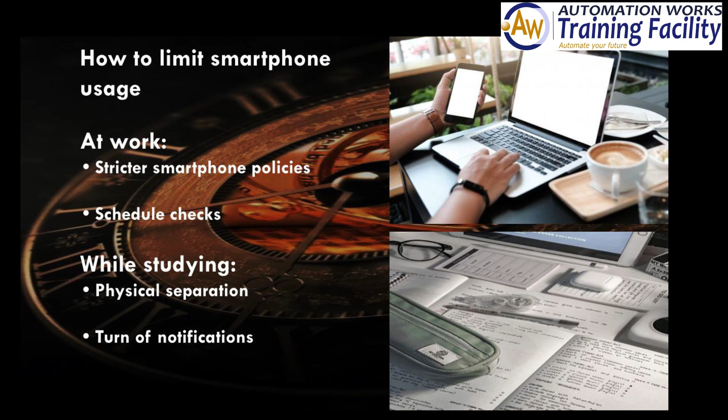Experts recommend that to limit this overusage at work, management can implement stricter policies on cell phone use. People can also, if they know they overuse their cell phone, make a schedule to show themselves when they can allow themselves to check their phone for notifications.

While studying, physical separation from your phone is recommended for students, like putting your phone in another room or turning off your notifications completely.

But although these recommendations exist, research still shows that on average about 1 hour of work time is wasted by workers, and students double that at about 2 hours of time wasted doing unessential activities on their smartphones, which gave me an extra boost to continue with my project to solve this problem.

And this is my final design. Now I will first demonstrate how it works, and then I will show you how we came from nothing to this.

So I call my device the timekeeper, and this is what it looks like. In front here we have touch buttons, which you use to set the time. These are intervals of 1 minute, 5 minutes, 10 minutes, 30 minutes, and 60 minutes.

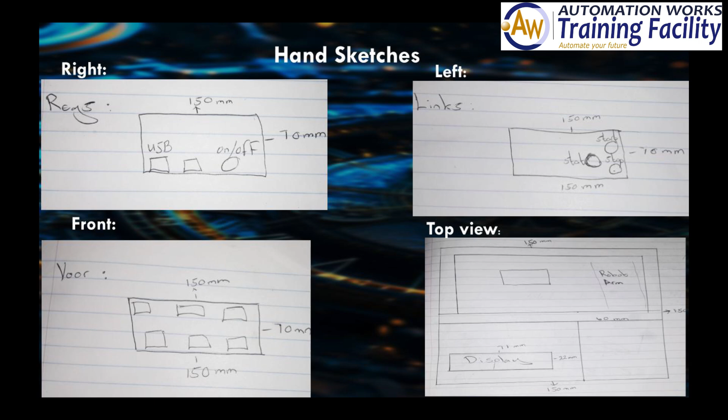And then I sketched the container box in Fusion 360, which is the software platform where we sketch 3D models. My measurements stayed the same as with my hand sketches.

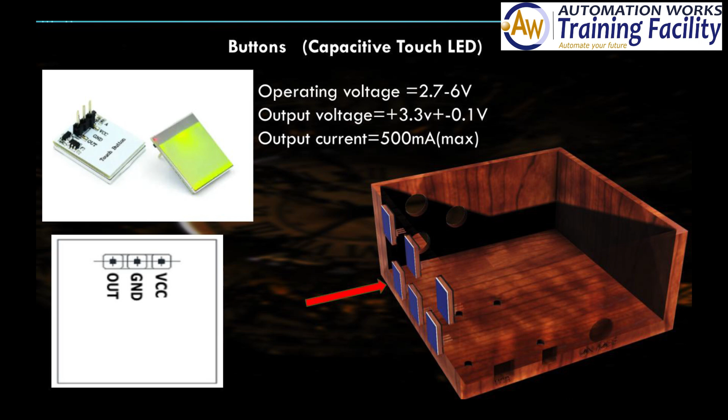And then I started fitting in the touch buttons to see how they will align. The touch buttons operate at a voltage of between 2.7 and 6 volts, and they get 5 volts from the Arduino inside.

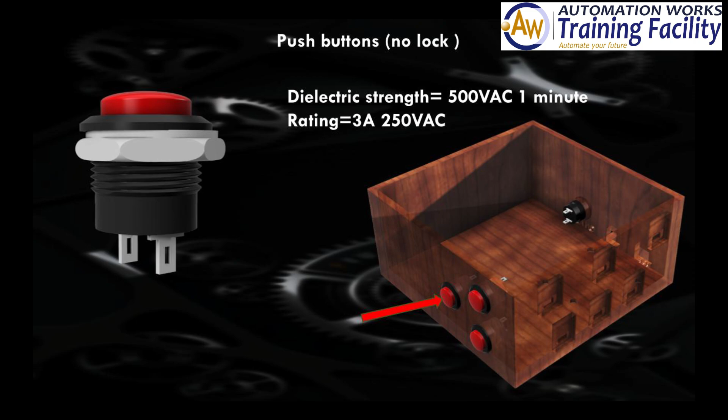And then I started fitting in the push buttons. These are no-lock push buttons, which means if you press them, they don't stay locked inside.

No, I forgot to switch it off. Okay. Yeah.

So these buttons act as a signal instead of an on and off switch. So I can even program the code to count how many times the button has been pressed.

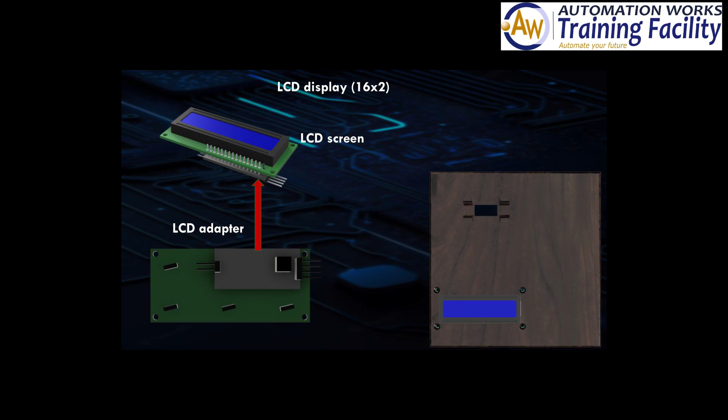And next up, I started fitting in where my LCD screen is going to be placed. As you can see, this is how I determined where it's going to be in the screw holes.

And with the LCD screen came the adapter. The adapter allowed me to, instead of using all those 16 pins and wiring all of them on the LCD, just use the adapter to make a 4-pin connection. So I only used 4 wires instead of 16.

1.5 kilograms when it is supplied with 6 volts, but it gets 5 volts from the Arduino inside. And it has plastic gears which allow the arm to spin.

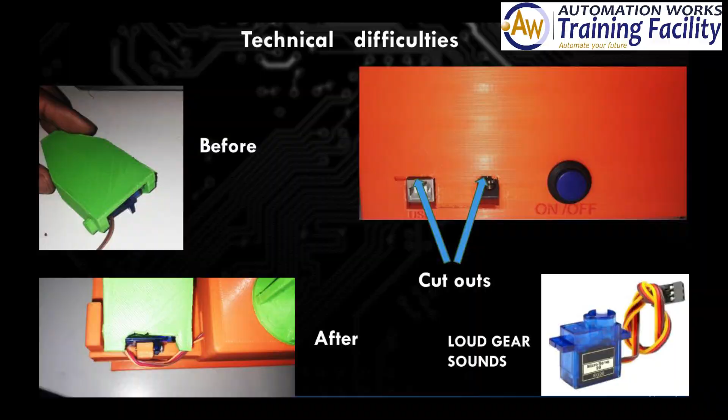The technical difficulties I had were: after I printed the robotic arm, when I tried to spin it, it kept hitting against the back part, the part I've cut out here, so the arm couldn't spin fully. I had to cut out that part, so this is the before and after. I also didn't compensate enough space for the USB to go in, so I had to cut out some pieces there too. The other issue I had was with the servo motors I used. The first two made a lot of noise before the sequence even began, which debunked the whole purpose of having a timer if it keeps making noise before the time is even run out.

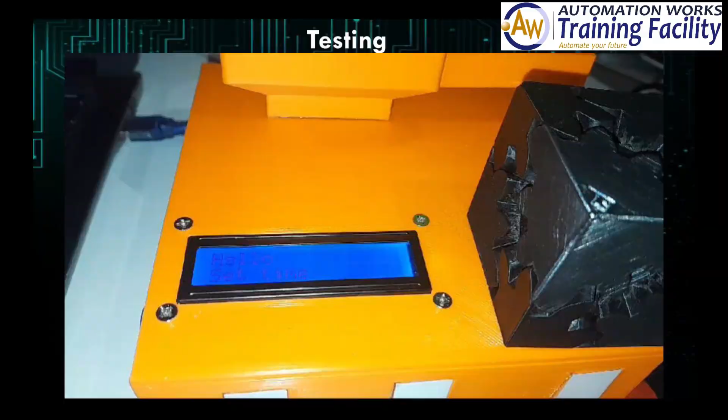This is a video when I first tested the device, but I can't play it now, so I'm just going to skip it because I've already demonstrated it to you. Oh, that's playing.

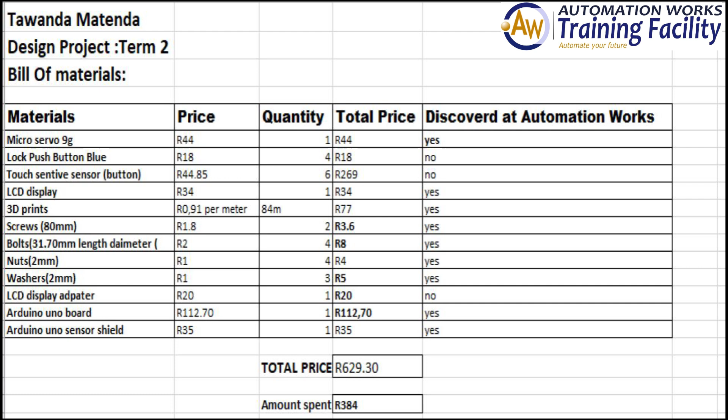This is my bill of materials, which shows how much the project actually cost me. If I bought everything that I used, it would have cost me about 630 Rand, but luckily I was able to source most of my materials here at Automation Works, so I didn't have to buy most of them. The ones I did buy cost me 384 Rand, including the 3D prints as well.

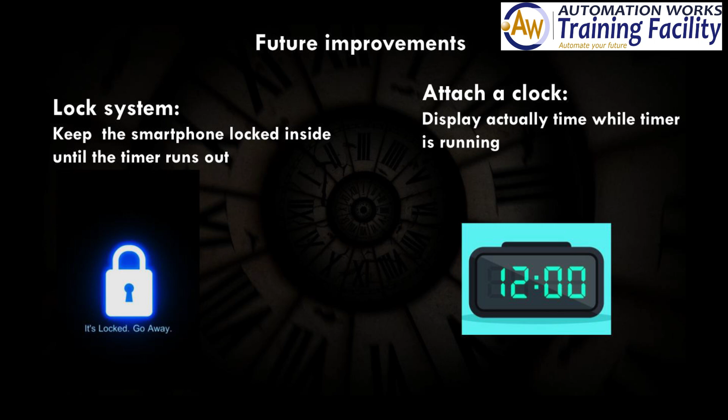For future improvements, I actually got an idea from one of my classmates, Raven, to add a locking mechanism here at the back. I can add a hatch that would open, so you can put your phone inside and it won't open until the timer runs out. I think that would be a good idea for those strict parents that want to control everything. Normal parents.

The other improvement I want to make is to add an actual digital clock here that will display the actual time, so that if you want to find out what time it is, you don't have to use an external clock.

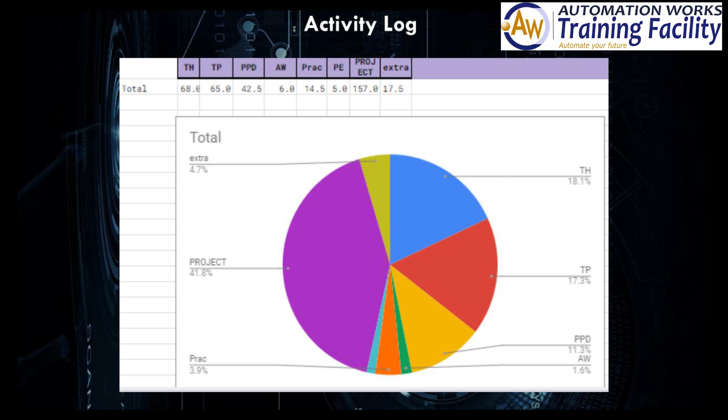And this is my poster.

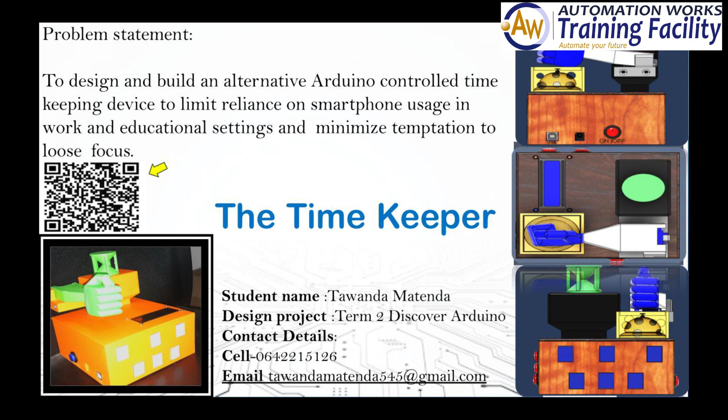I would like to give my thanks to Vainant for giving me the opportunity to be able to do this course, and to JC. Tani Almari said yesterday that JC turned us from boys to men.

How JC changed me is my whole perception of how I approach the problems I face. During this term, I asked myself why I am now so different. What has caused me to not, I almost want to say not care, but it felt like the things that used to give me stress and worry all went away, though they didn't actually go away. It was just that my perception of how I handled them changed. That was mostly thanks to JC, who gave us lessons on how we should approach our problems, like if we don't understand the work, or if it gets too much for us, or if we don't know where to begin.

Next, I would like to thank Tani Almari. Tani Almari always sends us motivational quotes every morning on the WhatsApp group. It's those little things that actually make a big difference in my day, and also in the day of the others that see those quotes.